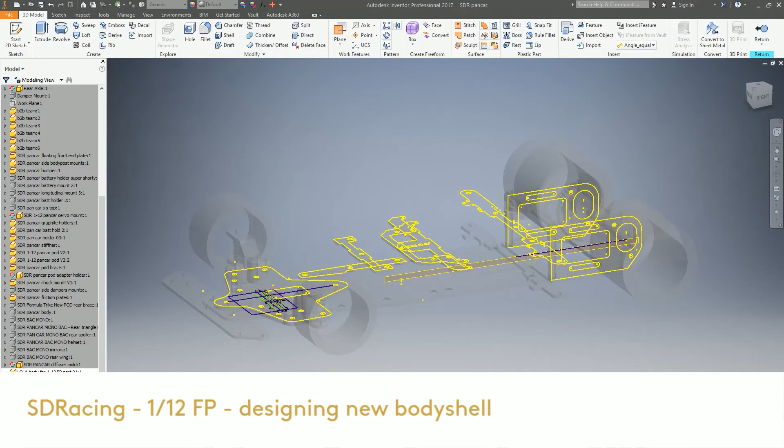So I have settled on an old 70s Lola, which you can see over here in cheesy yellow. It is a T290, although there were various iterations of that car, like there always is.

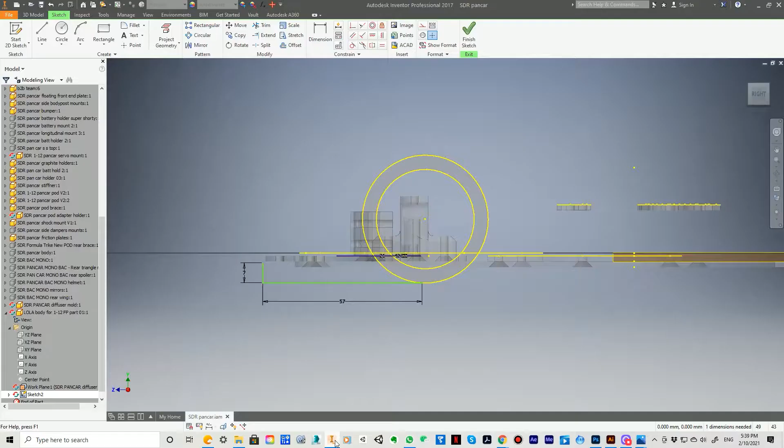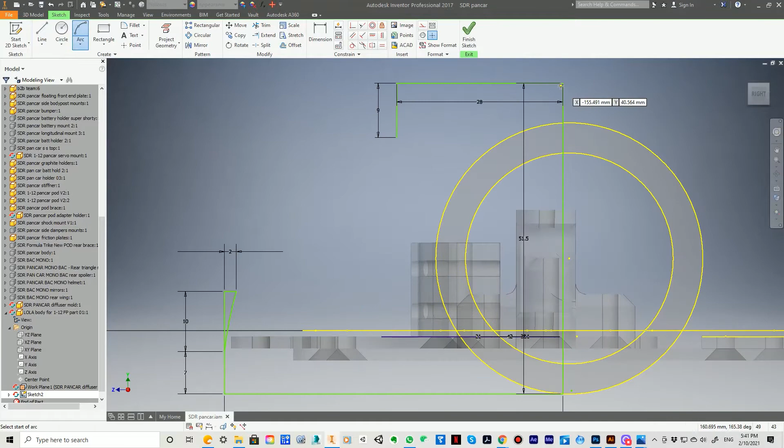The reason why I chose this one is I think it encapsulates quite well the proto era of the 70s, and because there were a few iterations that had fast tail or wing, I saw pictures with 2 or 3 different types of wings - one that was very long at the back, one that was more traditional like on the 260, and some that didn't have any.

So I chose that, which allows me to design basically a set for the body that will have different variants. So you see the green lines that I put at the back there is the wing.

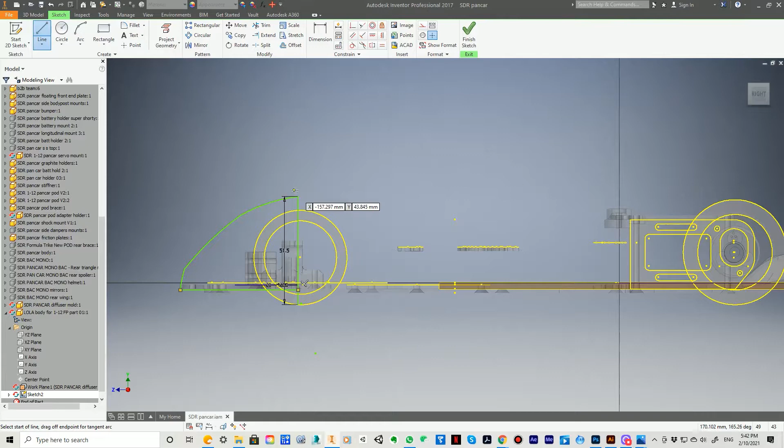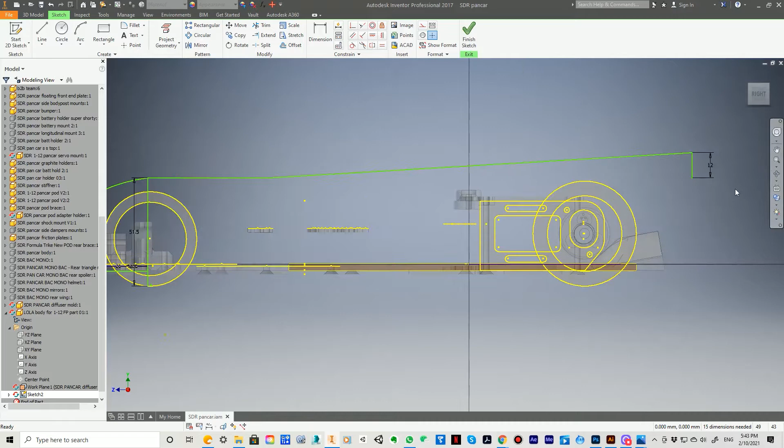So my original design idea is to design this car with a wing which is somewhat typical to the shovel bodies for the pan cars, which means it is integrated on the car and it is at the rear and it is fairly aggressive. But you will see when I'm building the body that there is a twist to this actual concept of the wing.

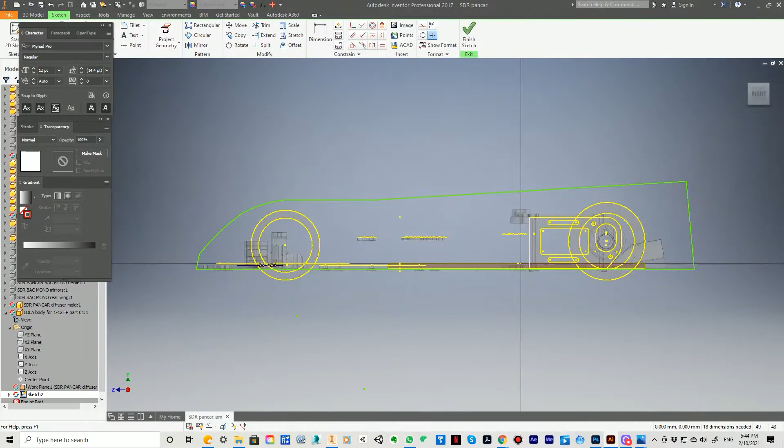So I'm doing a very rough shape. I'm taking all the measurements. The drawing of the car on Illustrator is to scale with the wheelbase of the car, and I have stretched the width of the car to fit the proportion of pan cars. So the body is 210 wheelbase and 170 in width.

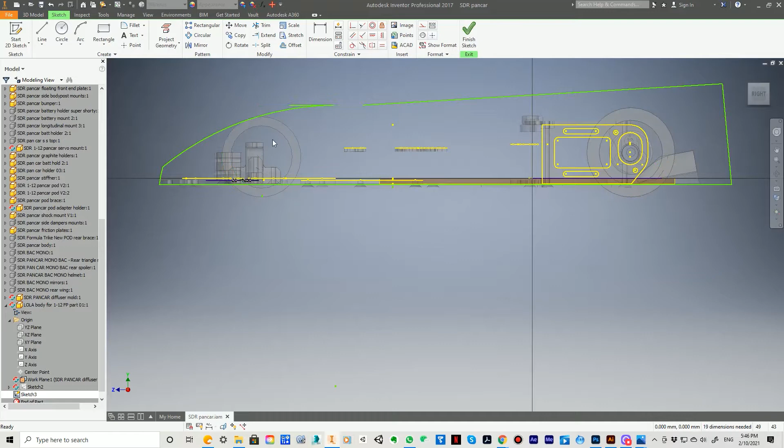So you can see I had first drawn the profile of the wheel wells above the wheel, and now I'm drawing the profile without it. So this will be basically the main shape of the car, and then I'm going to reuse the drawing of the wheel wells to add on top of the wheel.

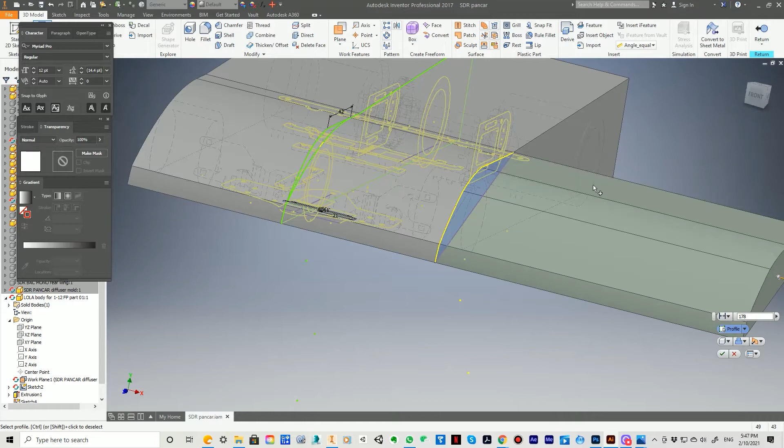So I'm proceeding fairly slowly. I'm trying to get something that is - well, let me see how to phrase it - I am not trying to do a 290, but I'm trying to do something that is as close as I can possibly get to it and be generic enough that you can paint it in any livery you like and it won't be weird.

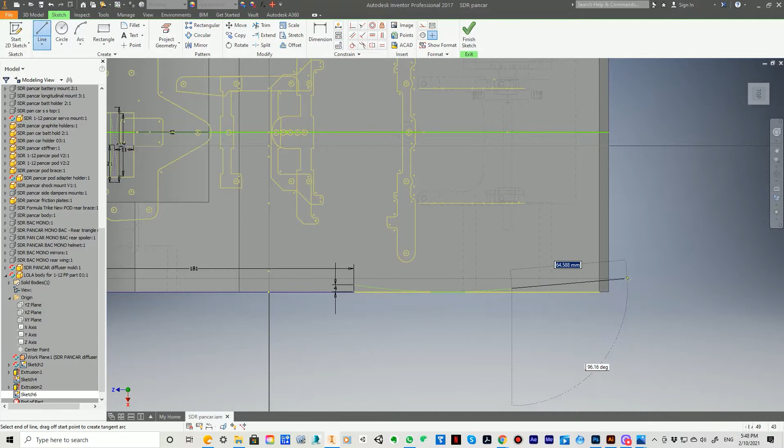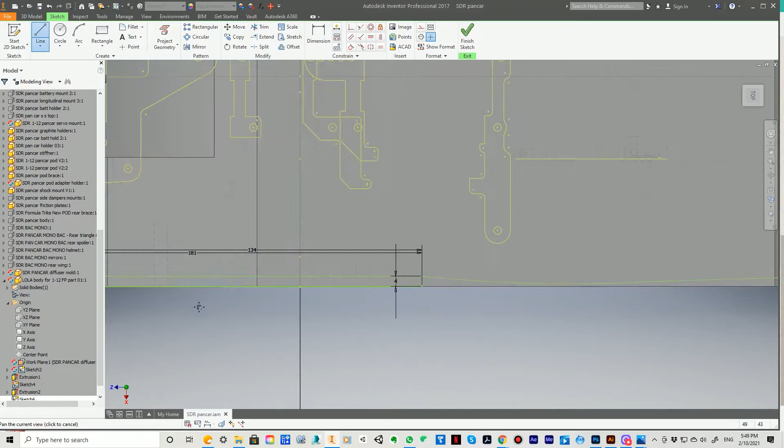So now what I'm working on is the profile, which is going to be cut raised on each side of the car. And of course, this being a vacuum formed body, I need to make sure that I don't have 90-degree angles. So this is going to be extruded off the sides at about between 3 and 5 degree angle, depending on the effect that I want to get.

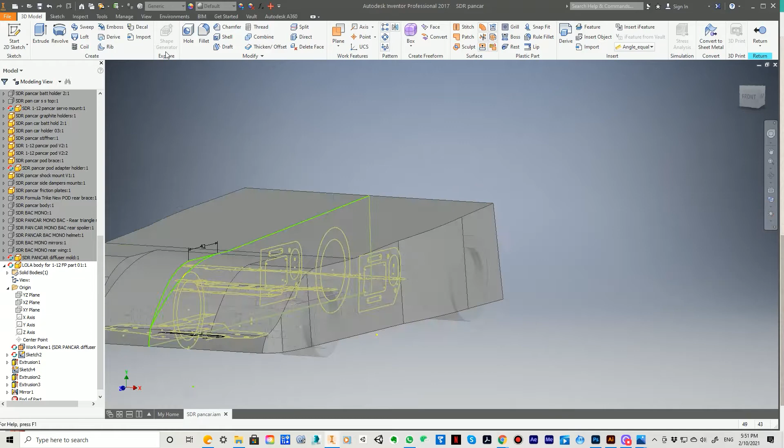5 degrees is really ideal, can be a little bit more, but this being really the main part of the body, 5 degrees is usually a pretty good angle to get. All right, so let's skip a little bit forward to getting a little bit more of the shape of the car.

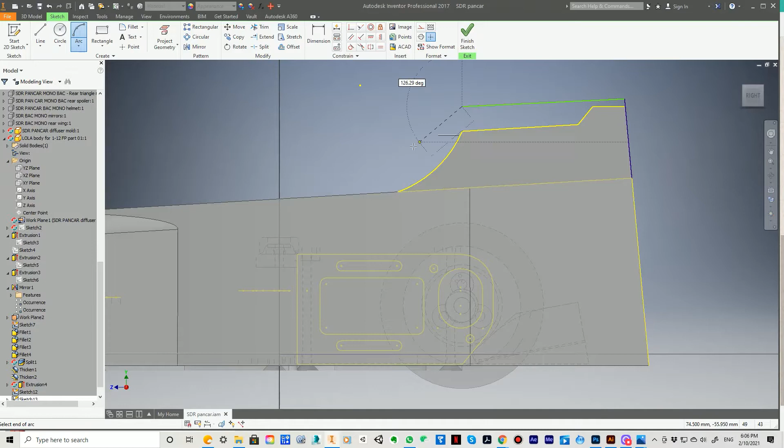All right, so I have now done the profile of the rear wing for the first set of the car, and I will explain why I mean the first set of the car. So you can see this is a fairly traditional pan car rear wing, except that it is forward. Usually the curvature, which is the high point for the downforce, is pretty much behind the center of the rear wheel. Mine is in front, which is going to bring it nearer to the body post as well.

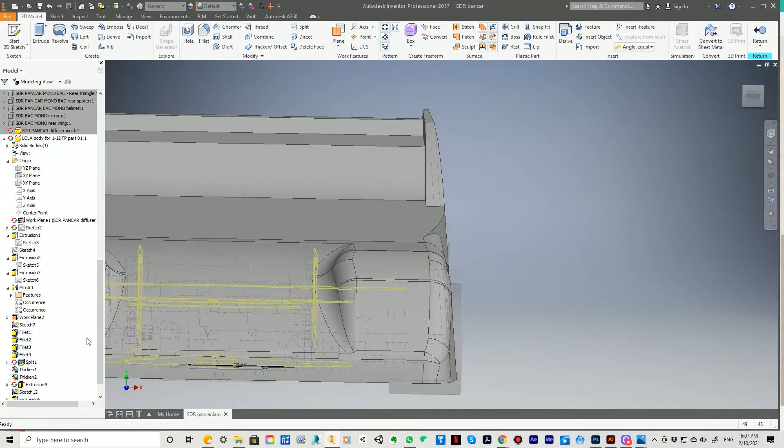And this is an area that can remain on the car, or it can be a cutaway part.

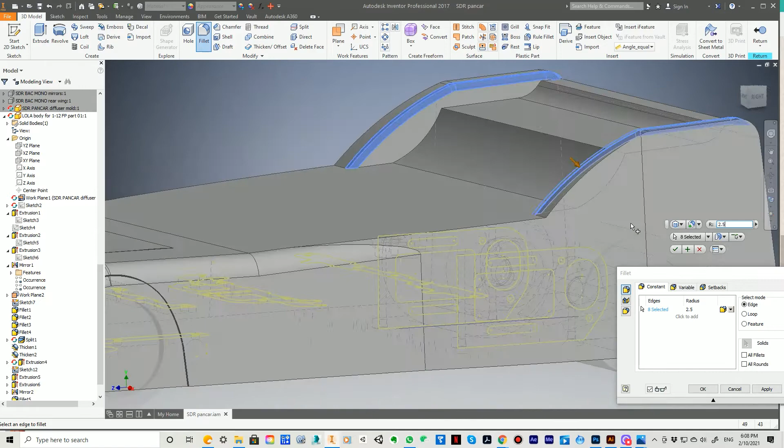So if you cut it away, you'd have a more realistic look of the pan of the Lola, but you'll have less downforce. You'll have the wind passing through, so you'll get a certain amount of downforce from the top, but you'll have more or less a fast tail at the rear.

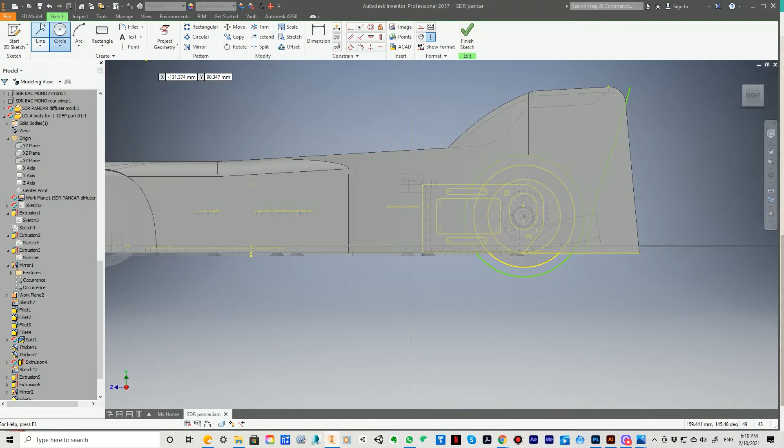If you keep it, you're going to have a fairly aggressive amount of downforce, because the body from behind the front wheel, about 3 cm back, slopes up all the way to the wing. This gives a very progressive downforce at the rear, plus the very aggressive slope of the wing.

If you don't cut it away, you're going to have a really big amount of downforce, angled pretty much to where the wheels are in contact with the floor at the back. So it should give a really aggressive downforce profile at the rear.

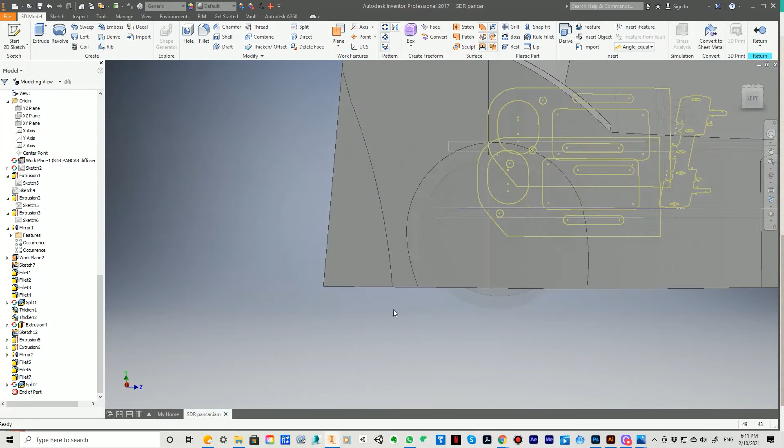The idea, if you want to keep the body looking realistic, would be to mask it and keep that section transparent. So when you finish painting it, you'd remove the tape and still have the look of a wing at the back with an open space.

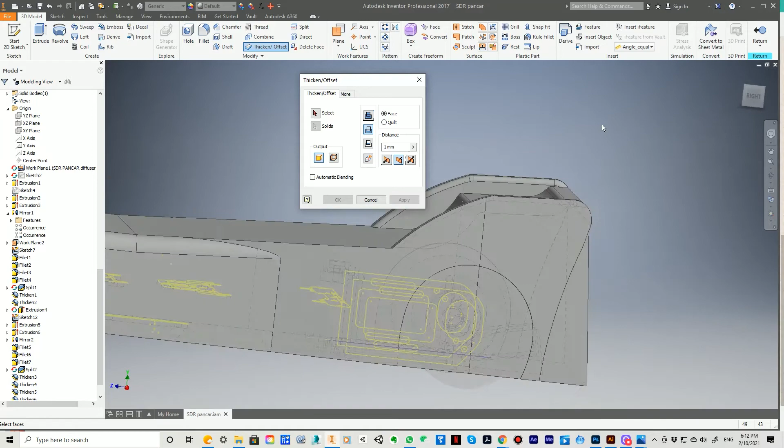I think it's still going to look pretty neat. But because I was struggling with wanting to do both the wing version and the fast tail version, when I split the body in two to create the molds later in the design process, I actually decided to create two rear ends for the car.

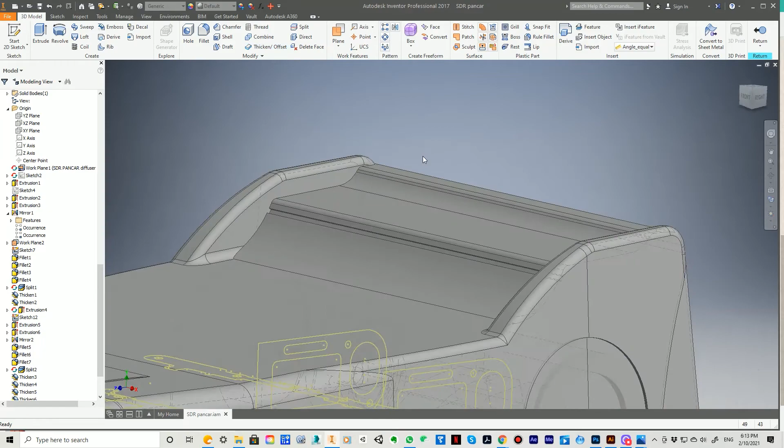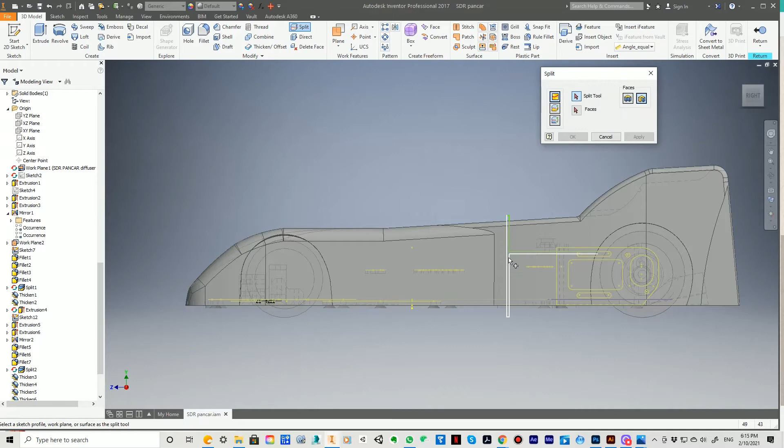This is very important to me because it's going to be the mold line as well for the rear end. The reason I chose a 70s Lola in the end is because of those very straight body lines, which will make it a very invisible seam when the two pieces are stuck together.

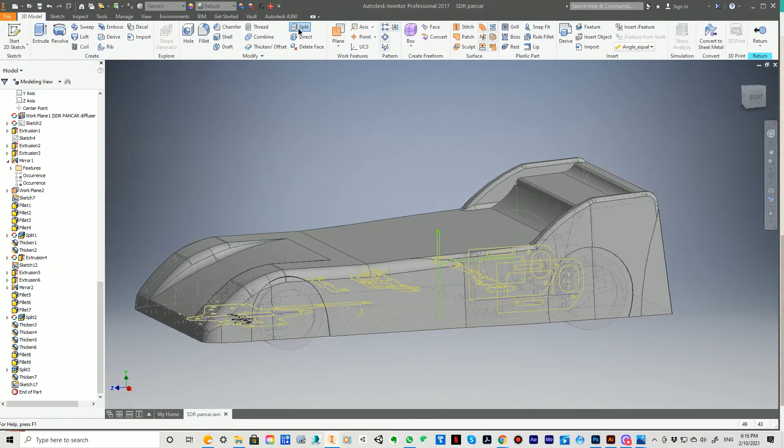This is really similar to how I did my 375, for anybody familiar with my vintage Ferrari chassis. I did similar work to have the two big body parts linked seamlessly and without any visual weirdness, so I've done the same here.

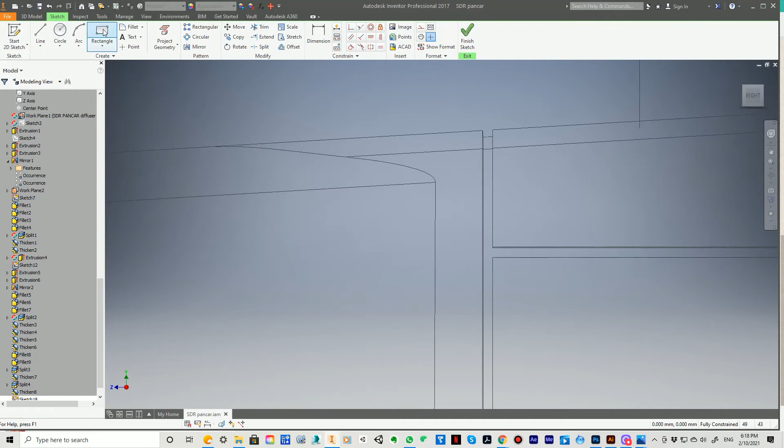This vertical line will be the separation between the front and back parts. They'll be attached right there with double-sided tape, like they are on my other cars. It's tried and tested, it works really, really well.

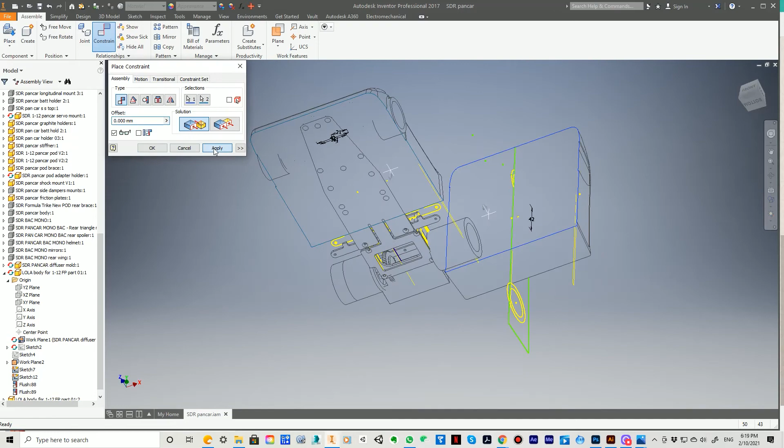So here you go - I'm basically stopping the design process now to cut the two parts, then reopen and reassemble them. So you have a very basic shape of the pancar, and you can get a good idea of where this is going in the near future.

Yeah, so I think I'm going to stop here for the first part of the design of the Lola. Now you know what car I'm doing for the project - it's inspired by a T290. Go take a look online.

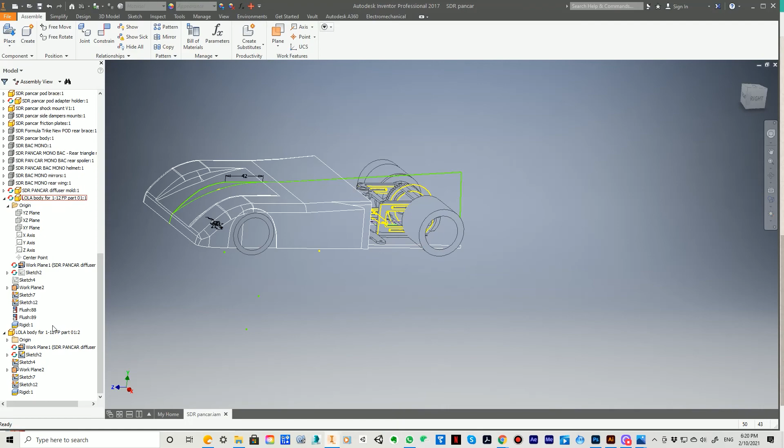Search for Lola T290 and you'll see all the different iterations of the car. It's a really cool looking car, and you can see there's going to be a lot of cool accessories with the design of this car.